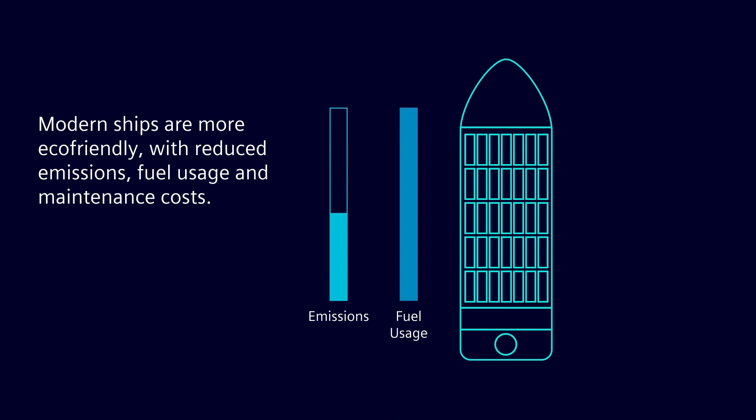Modern ships are very different from their predecessors. They're more eco-friendly, moving towards innovative propulsion systems and alternative fuel sources to reduce fuel consumption and maintenance while meeting stricter environmental regulations. They're smarter and safer, many with autonomous navigation features. The Internet of Things and big data analytics are driving these possibilities, transforming the face of the maritime industry with exciting new features and enhancements. All these new requirements fundamentally impact every aspect of how new ships are built.

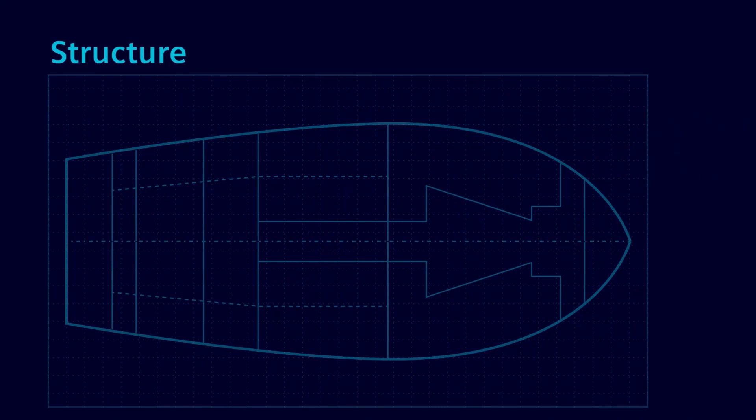But despite the demands for greater innovation, many shipbuilders still design, validate, and manufacture modern ships without modern tools, greatly limiting innovation. They use disjointed niche applications for each stage or process, delaying the discovery and resolution of problems until later in the process, and resulting in increased cost due to rework.

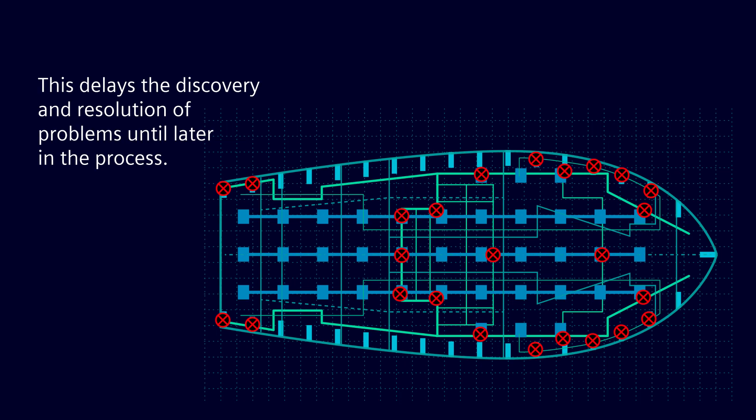Siemens Xcelerator Marine Engineering is helping you break those barriers to innovation by delivering the combined power of two industry-leading marine engineering solutions, NX and Foran. Shipbuilders can now optimize designs and accelerate time to market with unprecedented speed.

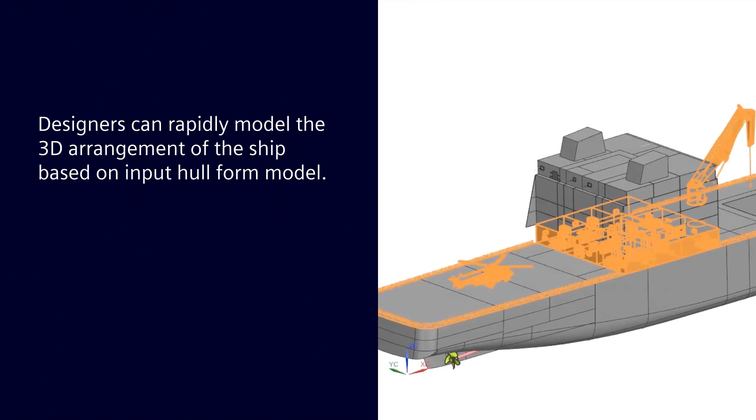Seamlessly integrated into the Xcelerator portfolio, these tools enable you to optimize workflows across all teams and all stages of design. For example, you get simplified hull-form modeling and rapid definition of the ship general arrangement in 3D, eliminating the errors and inconsistencies of traditional 2D approaches.

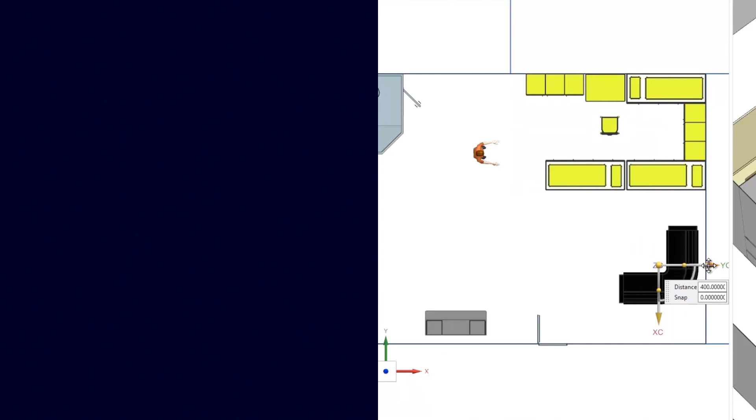Designers can create every aspect of the ship arrangement using rapid part placement from the reuse library that speeds design and helps simplify transition to the next design stage.

Once designed, integrated optimization tools enable you to easily produce hull form and performance optimization studies, so you can create highly innovative and optimized designs.

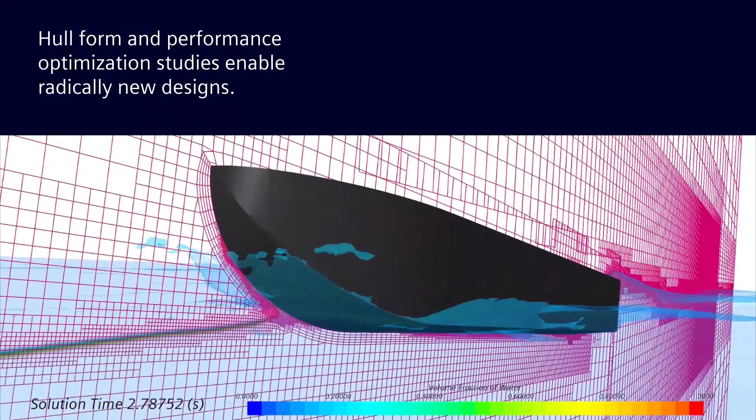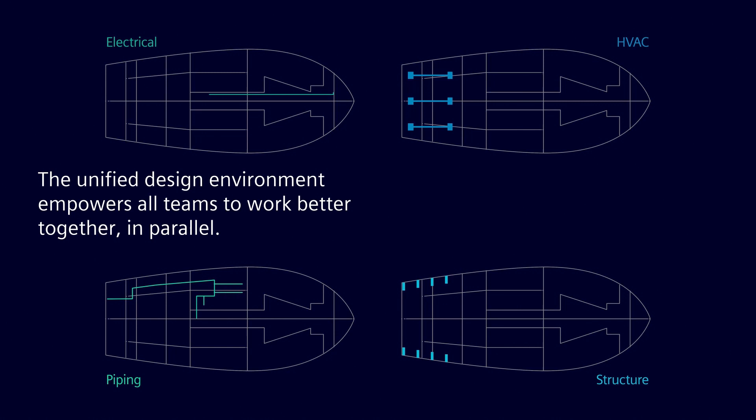A common interface allows you to author and modify data across disciplines designing the ship. The unified design environment empowers all teams to work better together in parallel with less risk.

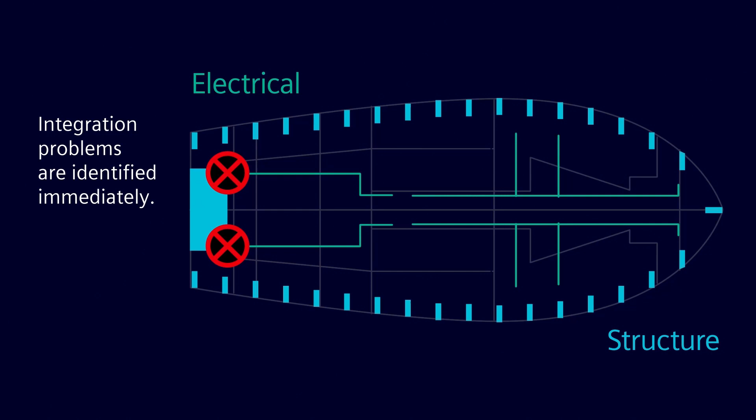For example, the electrical systems team can immediately identify if steel structure design changes introduced a new integration problem, enabling the teams to resolve it faster and avoid later, costlier surprises and delays.

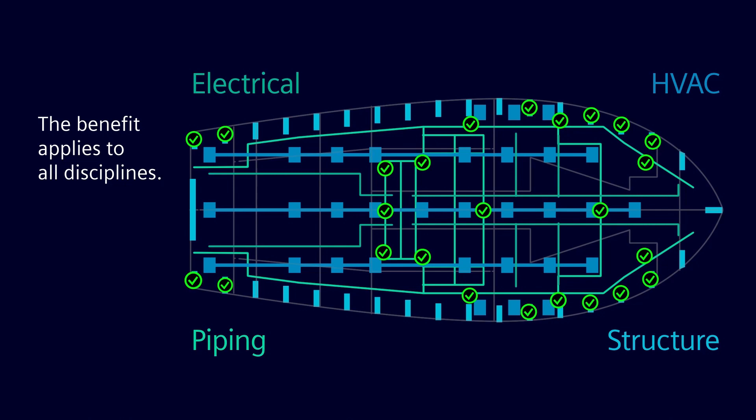And the benefit applies to all disciplines, from machinery accommodation and piping to HVAC, secondary steel, outfitting, and more. And data and designs from all teams can be visualized simultaneously in real time in a single collaborative environment.

When it comes to ship design, validation and quality must be assured early, and Siemens Integrated Validation simplifies those processes. Designers and engineers can perform a variety of validation checks continuously throughout the process to prevent time-consuming and costly problems.

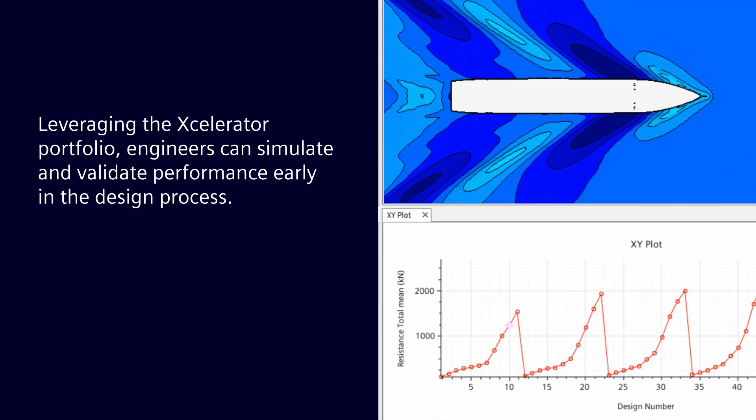Leveraging the full power of the Xcelerator portfolio, advanced fluid dynamics capabilities allow engineers to simulate and validate performance early, including hydrostatic and draft computation and power prediction.

Combining design with Teamcenter's collaborative design management streamlines workflows, further reducing wasted time and risk.

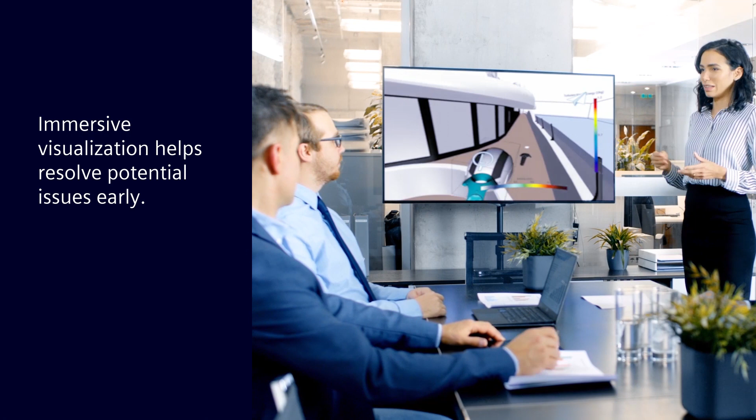Immersive visualization capabilities, including fly-through animations for team meetings and design reviews, help resolve potential fit and functional issues early. You can tap into extensive VR capabilities to provide crew training or interactive tours.

And these are just a few of the advantages Siemens Xcelerator Marine Engineering brings to ship design and shipbuilding. Visit us on the web to discover more about how it can help your team build better ships faster.